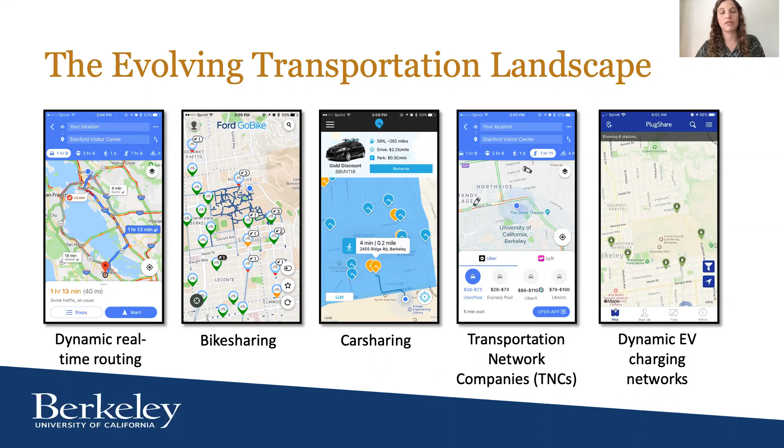In contrast, transportation planning and policymaking is traditionally carried out across much longer timelines, with a major focus given to the medium or long-term equilibria of the transportation system. In the US in particular, states and metropolitan planning organizations are responsible for forecasting and analyzing policy and infrastructure development scenarios at the regional level in order to evaluate their potential positive and negative externalities. These plans that are put forth incorporate transportation, housing, economic, and environmental strategies to meet the policy goals that are set forth by the state.

The figures here and in the next couple of slides are examples from Plan Bay Area 2040, which is the long-range plan for the San Francisco Bay Area that was adopted by MTC, the Metropolitan Transportation Commission, and ABAG, Association of Bay Area Governments, in 2017. Plan Bay Area 2050 is actually currently under development and is expected to be adopted in the summer of 2021.

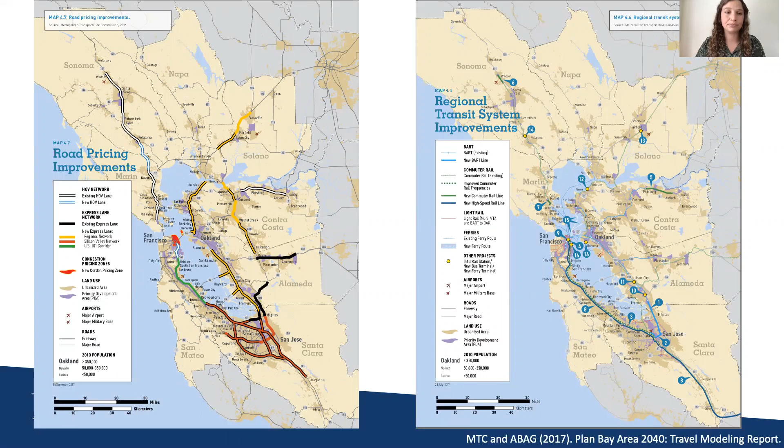So here we have a couple more examples from Plan Bay Area 2040 where discrete scenarios of transportation infrastructure expansion are modeled. On the left, road pricing scenarios are shown, versus on the right, regional transit system improvements are modeled and analyzed. The scenarios are typically evaluated using a set of metrics that reflect the impacts of these scenarios on system-wide performance in terms of congestion, pollution, and levels of service, among other metrics. Accessibility and equity are also commonly used, as well as metrics of economic vitality.

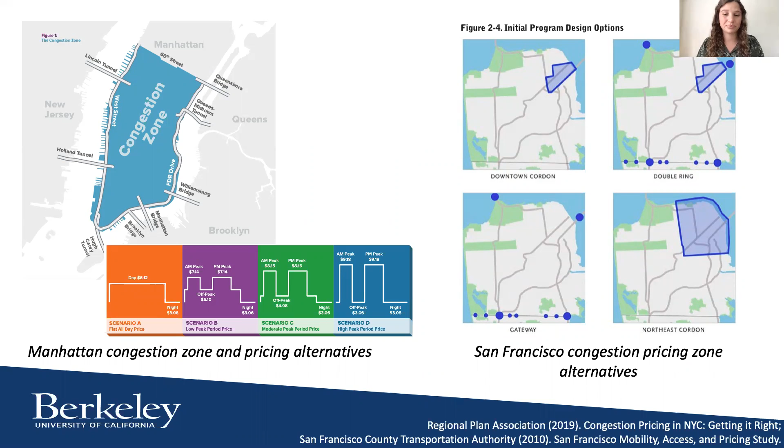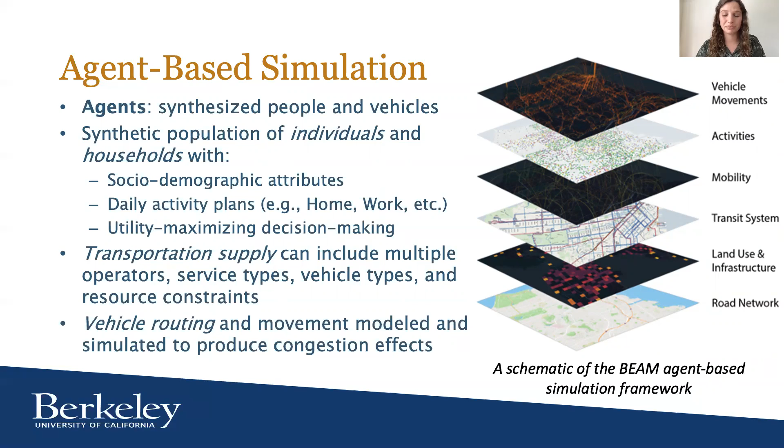In practice, travel demand modeling is typically used for policy scenario analysis using discrete policy inputs constrained by a priori analysis. These scenarios are modeled and evaluated according to multiple criteria, and decisions are made as objectively as possible. But the pursuit of multi-objective policy optimization is at this time limited.

While certain operational aspects of the transportation system are increasingly optimized, under public control, an example would be traffic control, or privately, vehicle automation and fleet management of services such as TNCs are being increasingly optimized. However, we have yet to build out the capability for truly dynamic and socially optimized policy design and implementation.

At this time, the capability for high fidelity predictive analysis of the impacts of interventions in the transportation system or changes in policy is sparse and highly resource intensive. It's costly to develop a well-calibrated travel model, as well as to run and analyze a large set of potential scenarios. Thus, there are concentrated resources mostly at the MPO level, and there are discrepancies across MPOs in terms of their capabilities and ability to model more complex scenarios and do more scenarios.

And even then, the calibration and validation of these models are limited by the scarcity of accessible data. Individualized or household level travel data is usually acquired on a cycle of about 5 to 10 years using travel diary surveys. Network level and even link level travel time and speed data is becoming more available.

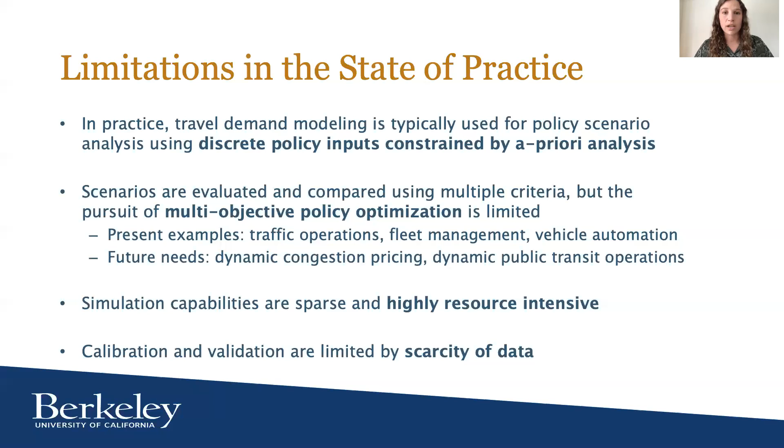So nonetheless, simulation does serve the essential purpose of enabling researchers and practitioners to execute predictive analysis of interventions in the transportation system. And those could range from changes in the distribution of travel demand to changes in the supply, governed by vehicle access, operations, and pricing, or any number of other policy inputs.

So now we'll turn our attention to BISTRO, which is the Berkeley Integrated System for Transportation Optimization. BISTRO is an open source framework for transportation policy decision support and optimization that was developed by researchers from UC Berkeley at the Institute of Transportation Studies in collaboration with Uber Technologies.

BISTRO functions as an optimization superlayer to the agent-based simulation engine called BEAM, the Behavior, Energy, Autonomy, Mobility Framework, developed at the Lawrence Berkeley National Lab, also by ITS-affiliated researchers.

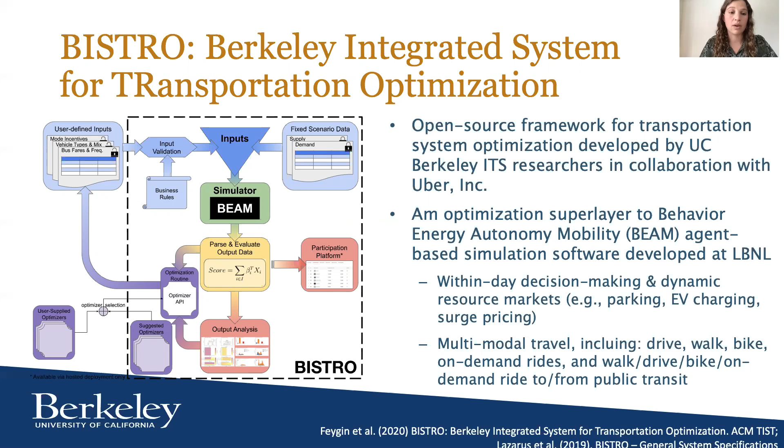And BISTRO parses the raw BEAM outputs once a BEAM simulation has been run in order to evaluate a set of user-defined objective functions that can be used in optimization. And we have also developed a library of suggested optimization algorithms that can be deployed. And we use Docker containers to facilitate OS-agnostic, local, and remote execution of BISTRO.

Some examples of the optimization inputs include pricing, which can alter public transit or on-demand ride fares, and operational adjustments for public transit and on-demand ride services that can change the number or mix of vehicles in either fleet, as well as alter the schedules, and we can also alter on-demand vehicle availability through rebalancing algorithms.

And finally, infrastructure investment is another policy input, which could include the location of vehicle charging stations or the quantity and location of parking facilities.

And additional objectives can also be specified as a function of any of the outputs that are parsed from BEAM. Those outputs include detailed data from every traveler decision and every vehicle movement throughout the simulation. So you can just imagine the possibilities of what kind of study could be set up using BISTRO.

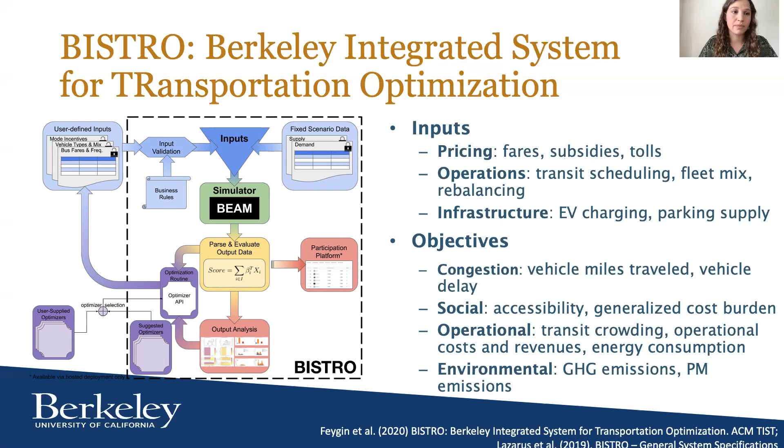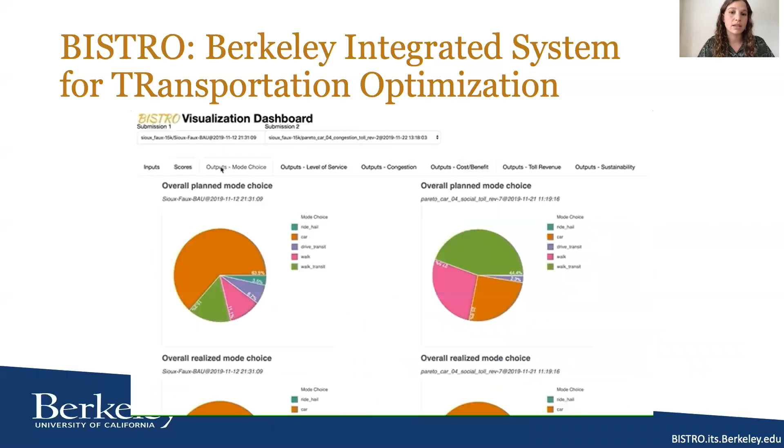And finally, BISTRO stores the parsed data in a relational database that powers a visualization dashboard, which you can see in this video, that can be used to investigate different policies and can compare BISTRO runs side by side using visual analysis of key metrics. And those metrics are shown disaggregated across time of day, across the network, and across sociodemographics in the synthesized population. It's really quite useful.

Now, I'll dive into the actual optimization problem that BISTRO solves, which will hopefully help to concretize what it is that we're optimizing. So the problem is broadly referred to as a simulation-based optimization problem. Here, I'll provide a brief overview, and then I'll go into some more specifics in the following slides.

The key variables of interest include a decision vector or policy input, which we call D, the configuration inputs, which are fixed data, those are Z, and then the simulation outputs that result from running the simulation using a given configuration and policy. We note the constraints here is the function G,

and you can see that we consider the objective functions, denoted as big F, to be stochastic, as there is a considerable amount of stochasticity in an agent-based simulation due to the stochastic nature of the behavioral models that are used, or perhaps other models if we're talking about a different simulation. In transportation in particular, the main source of stochasticity is indeed in the behavioral dynamics. So for that reason, we optimize the input based on the expected value of the objectives.

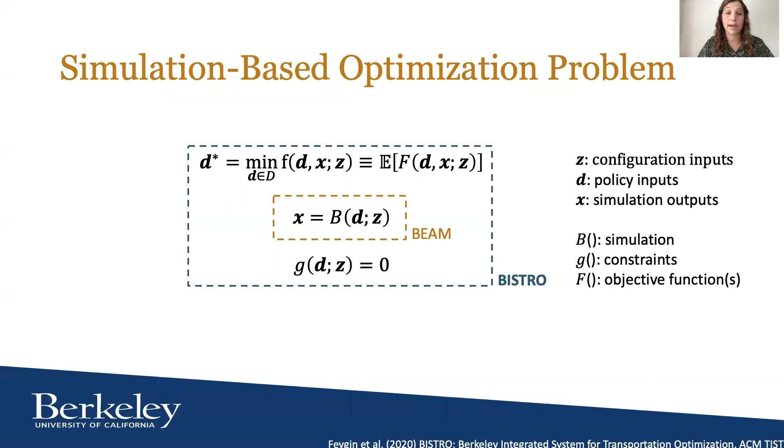So more specifically, in a simulation-based transportation system optimization, the first step is a scenario configuration, which involves specifying the transportation network, which includes the location of all nodes and links in the network, as well as the attributes that define the capacity of links and the speeds of vehicles in the network as a function of the volume of vehicles throughout.

Next, mode-specific parameters are also part of the configuration, and these define the characteristics of each of the modes. Modes can include walking, driving, biking, public transit, and on-demand rides. So these parameters will specify fares, pricing, schedules, and other operational parameters. Next, the vehicle parameters define the type and number of vehicles operated by each agent or transportation service operator, such as public transit operator or an on-demand ride service operator.

And finally, the population parameters define the individual characteristics of travelers, which include the size and location of households, travel plans of individuals, and sociodemographic attributes. Again, these are all fixed data in the simulation.

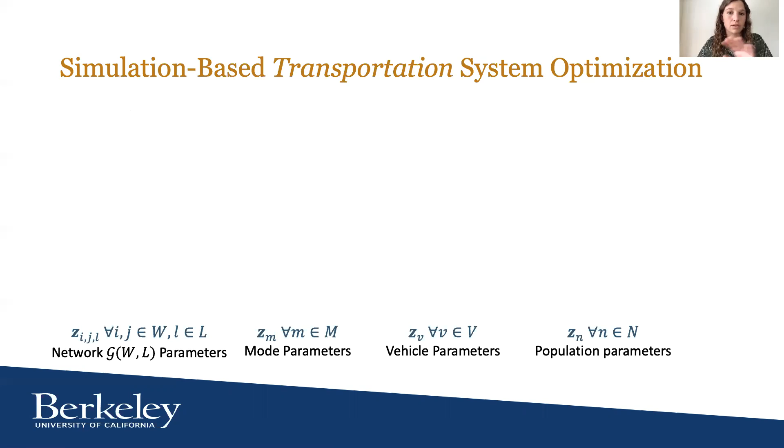So, as I said, one of the main sources of stochasticity in a transportation system is the behavioral dynamics of the mode choices. This variable that I'm showing here defines what mode is used by individual N for a trip from I to J at time T, given the configuration of the network.

So in BEAM, mode choices are modeled as utility maximizing decisions, where the probability that a mode is chosen by a particular individual for a particular trip is equal to the probability that the utility of that trip using that mode is greater than the utility using any other mode.

The utility is a linear function in this model of the attributes of a trip, which include travel times and costs, but they can also include other parameters such as the trip purpose or destination of the trip, as well as other parameters that you could include signifying comfort. For example, is it a pooled trip or not? How many passengers are in the trip? Things like this. Utility can also be a function of individual characteristics as well.

So one of the models that can be used to compute this probability is the multinomial logistic regression, or logit, which is shown here in this ratio. And we'll keep that here for reference. The outcomes of the mode choices essentially determine the distribution of vehicle demand across the network.

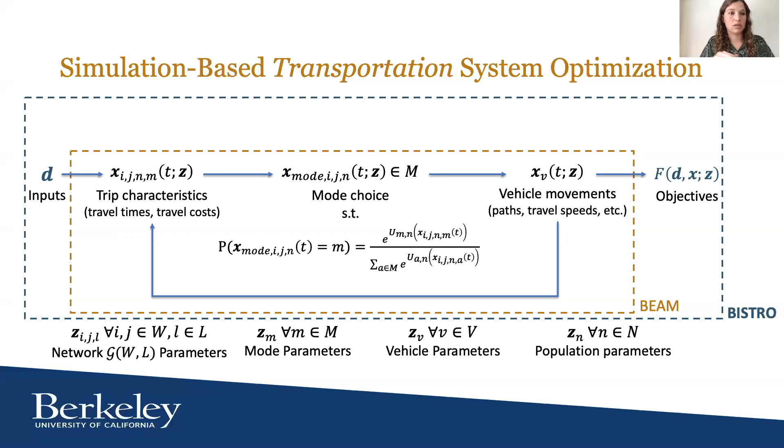So as I have described previously, BISTRO enables the specification of policy inputs, which essentially alter the outcomes of trip characteristics, and parses the BEAM outputs into any number of specified system objectives. So you can imagine here that in addition to each of those key X variables being dependent on Z, that they're also dependent on D.

So then BISTRO enables the optimization of those inputs based on the specified objectives. And I will give some examples of those optimization algorithms that we have developed for BISTRO in a moment. But the user is certainly free to develop their own approaches as they wish as well.

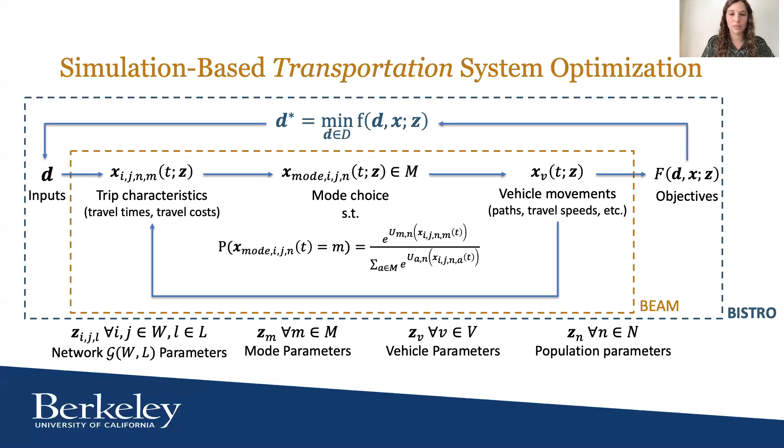So now we'll discuss the Uber Sioux Faux Hackathon, in which we beta tested BISTRO in the spring of 2019 as part of an internal hackathon among employees at Uber. We wanted to test the usability of BISTRO while posing a difficult challenge to folks in the AI and ML communities at Uber. The hackathon was posed as a competition to optimize 4 policy inputs for a fictional scenario with 9 different policy objectives.

We adapted the Sioux Falls bus network as the sole public transit service in the city. So when we say public transit for the Sioux Faux scenario, we are referring to bus. And in the base case, which we refer to as the business as usual, or BAU, we have about 3/4 of agents choosing to drive.

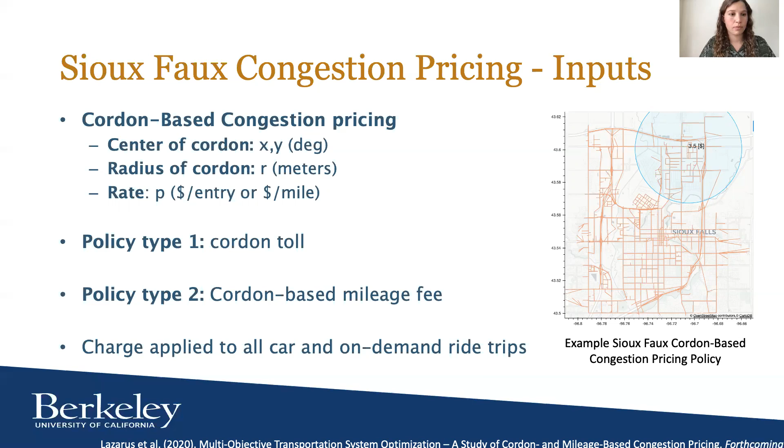So another one of our goals with this study was to further our understanding of the trade-offs between objective functions and to investigate the role of weighting in scalarized multi-objective optimization. So you may recall that in the Sioux Faux hackathon that we did with Uber, we chose not to weight the different objectives. And here, what we're doing is actually applying weights to 3 groups of objective functions. So we group them into congestion, social, and toll revenue, and apply a weight to each, to the average of scores within each group.

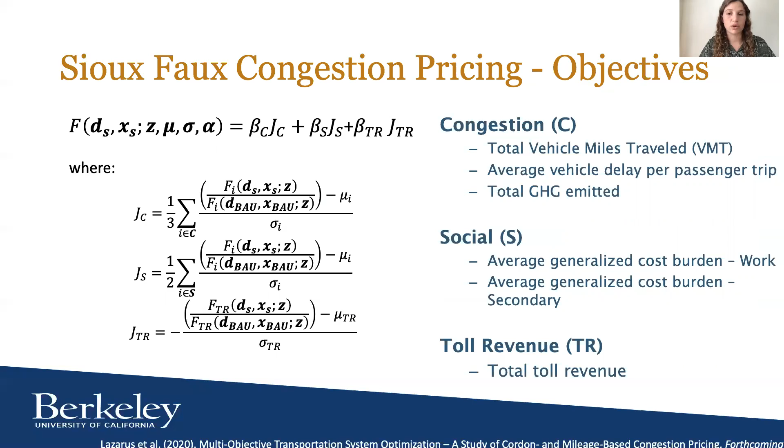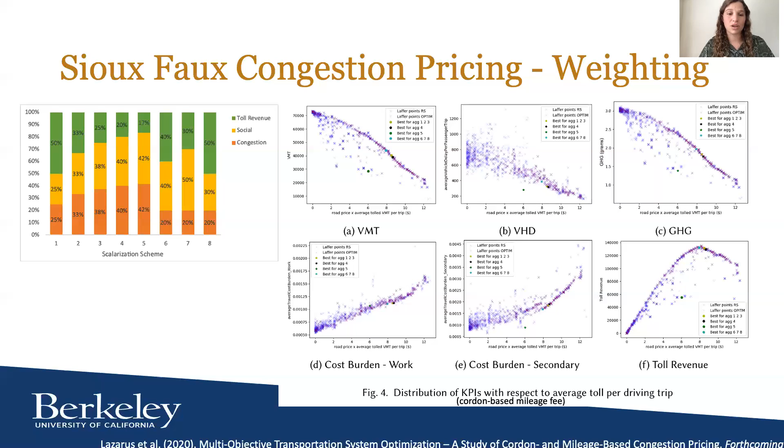So we're encouraged by this, and definitely influenced in which scalarization scheme we chose to put heavier weight on the toll revenue objective. But this was not in pursuit of maximizing profits. Instead, we were just aiming to take advantage of that concavity in the relationship between toll revenue and the input, the average price. So we ultimately chose to optimize the pricing policies using the sixth scalarization scheme shown here. So that included a 40% weight on toll revenue, 40% on the social score, and 20% on the congestion score.

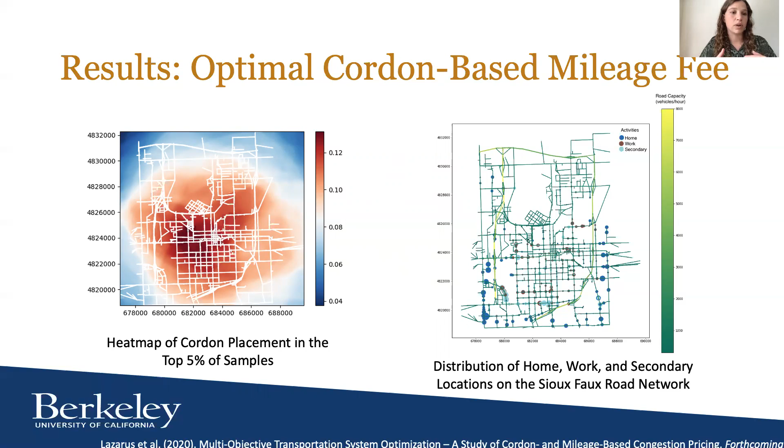So we see that the optimal location for the cordon-based mileage fee is centered slightly southwest of the Central Business District in Sioux, and it covers areas where both work and secondary trips are located, but there's less density in places where most of the home locations are located.

So this is the last of the results that I'll share for now, as we are still working through this research, but this is quite exciting. We were able to approximate a three-dimensional representation of a theoretical concept from economics, which is called the Laffer curve. And the Laffer curve is typically discussed in the context of taxation, as it plots the concave relationship between total tax revenue and a tax rate.

So again, I'll note that we did not seek to maximize toll revenue for the sake of maximizing profit, but rather we were trying to take advantage of this existence of a maximum in that relationship to drive the optimization to completion. Because as you saw, if the balance tips to either the congestion or the social scores of the optimization, it will just push to one side or the other: either try to maximize tolls and cover the whole city so that no one drives and we reduce congestion, which isn't really a feasible or desirable result, or it goes to the other side where it just reduces tolls in order to minimize the social cost.

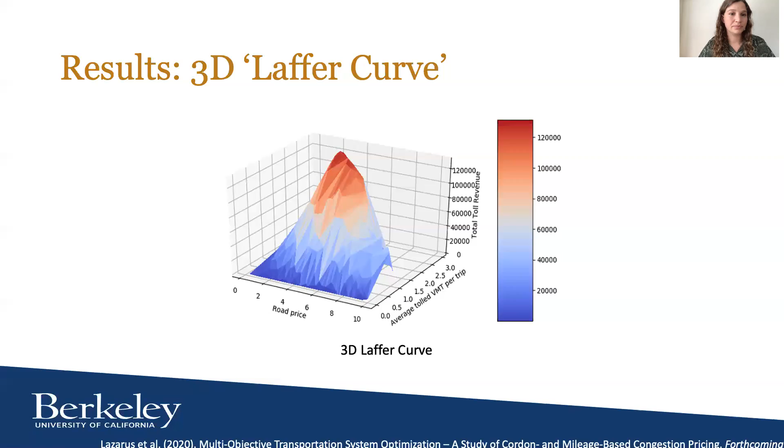So as we wrap up, this initial research that we're doing on congestion pricing in Sioux is also being augmented by an effort to build out a scenario that represents the city and county of San Francisco using an existing model from BEAM called the SF-light model. And we are hoping to produce more valuable, actionable insights regarding the placement and structure of congestion pricing in a city such as San Francisco, and also include optimization of complementary policies such as subsidies and transit service adjustments, as we had demonstrated that we could do with the Sioux hackathon that we had done previously.

And in addition, we are investigating a Pareto-based objective function that maintains the multidimensionality in the optimization in comparison to the aggregated scoring functions that we have explored to date. And finally, potentially one of the more exciting efforts is the prospect of developing a transfer learning approach to make use of data across scenarios, or even within a scenario across sample sizes, in order to leverage those insights across experiments or variations in the same experiment, and potentially develop optimal policies that can withstand changes or disruptions in the business as usual and maintain their optimality.